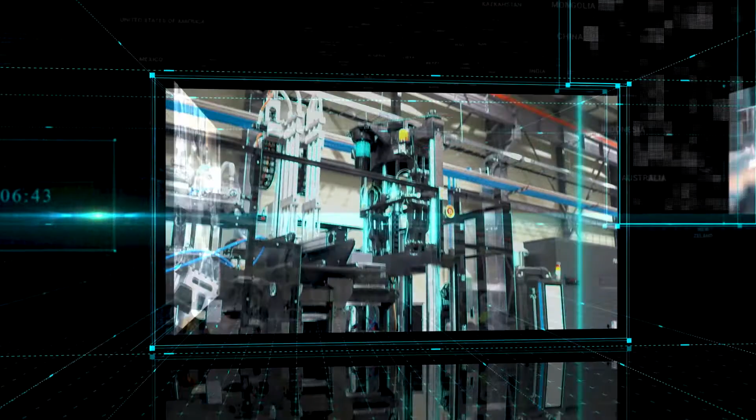While looking at this factory, what are the outstanding leaders? This manufacturing plant consists of numerous production facilities made by different companies. Some of these intertwined machines are automated systems, but some are operated by workers.

A problem may happen when the facility is working. We have to shut down the whole system until the problem is solved, which usually takes lots of time to find the reason for that problem. This is because there is no leader who can consider all the machines together and operate them as a whole.

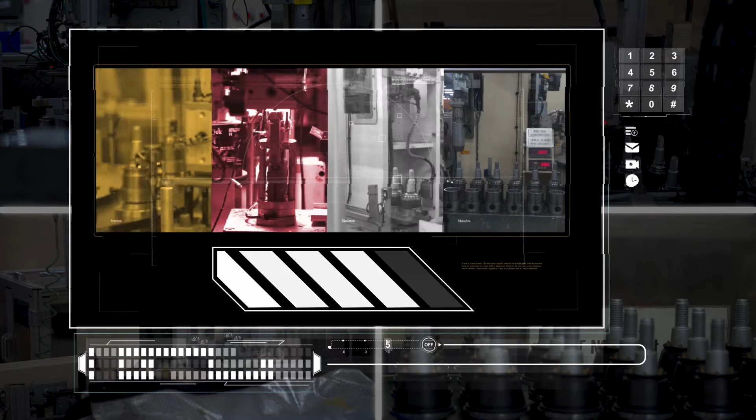Therefore, now we're going to assign a leader who can solve the problem during an emergency. An excellent leader in a manufacturing plant is expected to aggregate data from all the devices and make correct diagnosis accordingly, so as to maximize the productivity of each device. That's the core technology of the manufacturing operation system, as we thought.

What is the AAS-based manufacturing operation system? We can see many applications in real life. You can easily access and utilize various functions through one operation system. The AAS-based manufacturing operation system has the same feature, as it is operated by integrating all the production factors. And we call a factory that incorporates such systems Smart Factory.

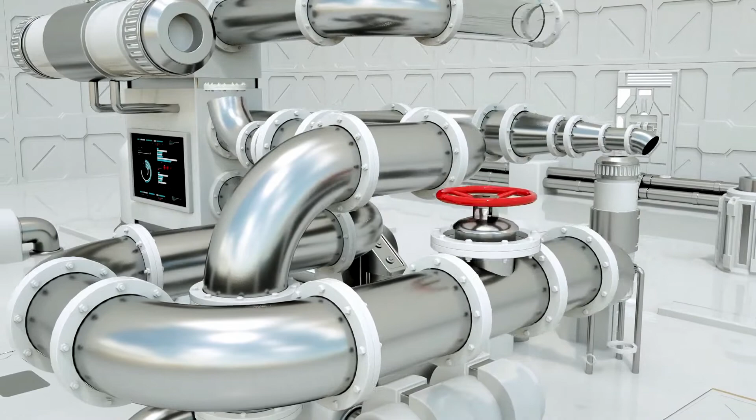Why is AAS-based manufacturing operation system essential in future manufacturing systems? In 2011, Germany proposed Industry 4.0, which provided a new direction for its domestic industry development in line with the Fourth Industrial Revolution. The key vision towards 2030 is to achieve autonomy, interoperability, and sustainability.

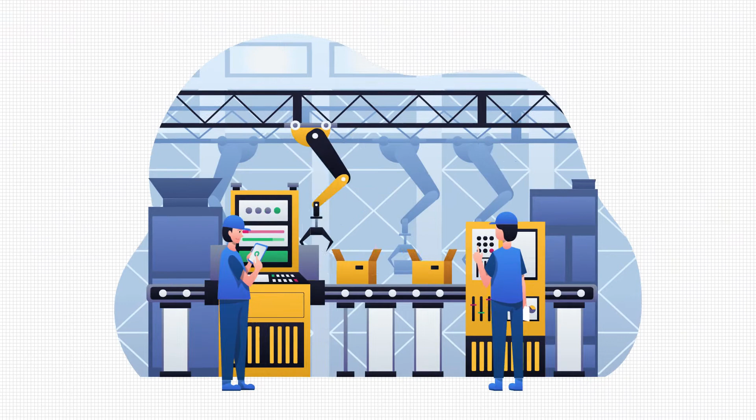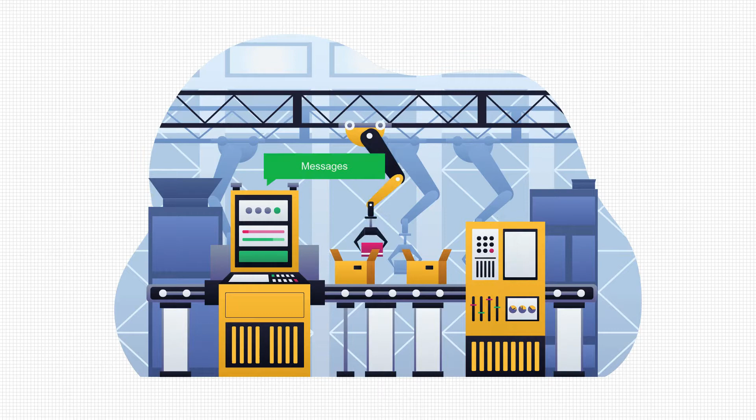Future intelligent manufacturing factories can communicate with each other flexibly, for example, person to person, person to machine, and machine to machine, and it can achieve a sustainable state through process autonomy and mutual compatibility. Through this, many tasks can be performed in a faster and more efficient way than now. The AAS-based manufacturing operation system is essential to enable process autonomy.

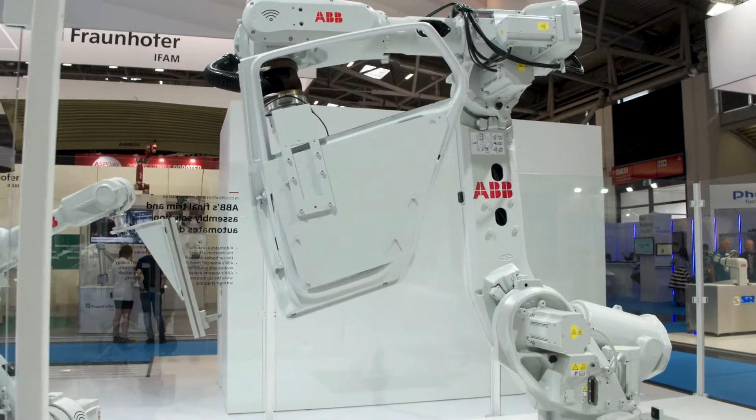In order to make machine and machine autonomously communicate with each other, the first key enabling technology is AAS-based digital twin. AAS-based digital twin technology is a digital representation of objects. Each object is given a digitized name, such as ID.

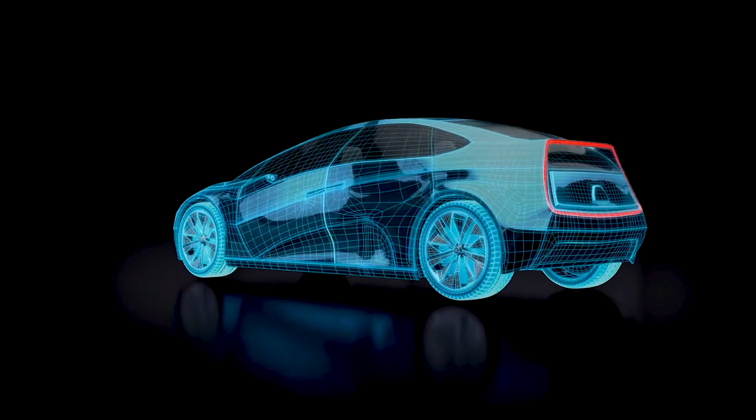There is a cup of coffee. I'll make an AAS-based digital twin for an object of cup containing coffee. For example, the type, color, and size of the cup, the amount and temperature of coffee in the cup, etc. Each of these characteristics is digitized and named individually. Now we can describe all the characteristics of a real cup in the digital world using the AAS-based digital twin we made.

But what if three people, Chosu who lives in Korea, Michael who lives in Germany, and Anna who lives in the United States, make their own AAS-based digital twins for the same object? Three people make AAS-based digital twins for the same object, but they cannot understand and utilize each other because expression ways are different.

Thus, the AAS technology can help freely express and exchange all the characteristics and functions of a same object using a standardized language the machines can understand.

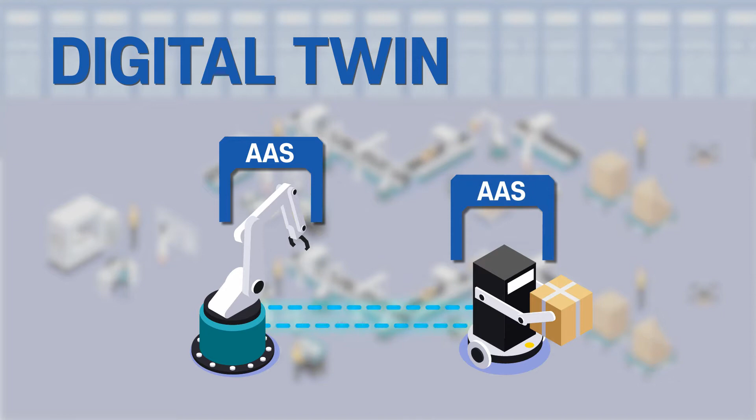Let's enter a real factory. There are many devices connected with each other in this factory. If these devices are represented through AAS-based digital twins, then devices will be able to autonomously communicate with each other and flexibly execute tasks in the digital world, like the communication among humans.

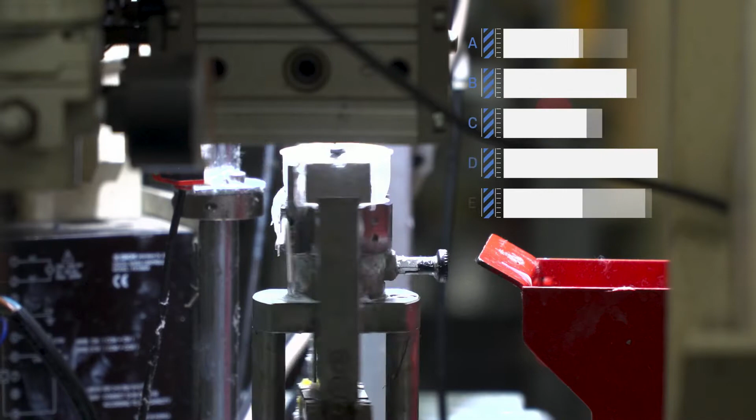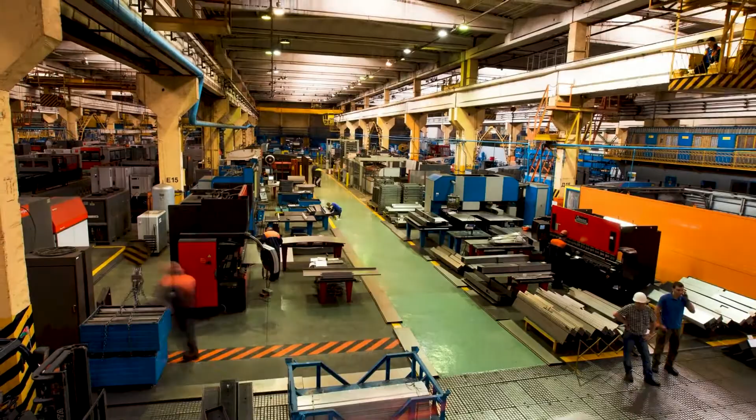In addition, this is not just the communication among devices, but it can also be extended to the communication between factories. Data generated at the manufacturing site use different rules depending on the manufacturer, such that their expression forms are all different. Edge connectivity helps connect various manufacturing sites. It connects different network technologies, converts field data from different systems into structured data as defined by AAS.

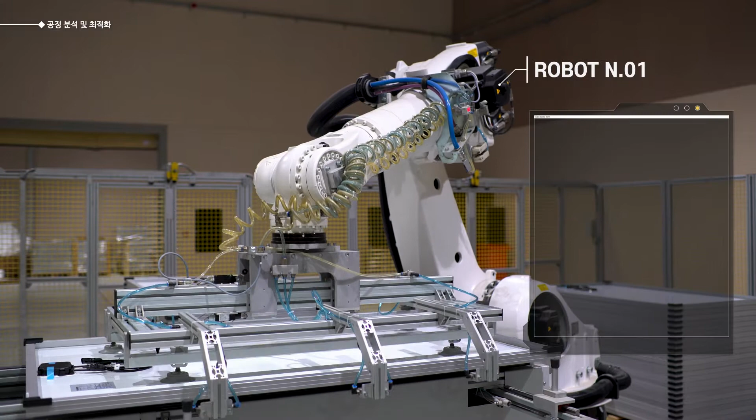AAS-based manufacturing operation system plays an important role in analyzing the production process by collecting data from all the production equipment in real time and assigning meta-information to those collected data. In particular, some data which were collected without a specific purpose can be important from the perspective of other devices. Through this data collection and analysis process, various measures can be proposed to improve productivity and reduce defect rates and costs.

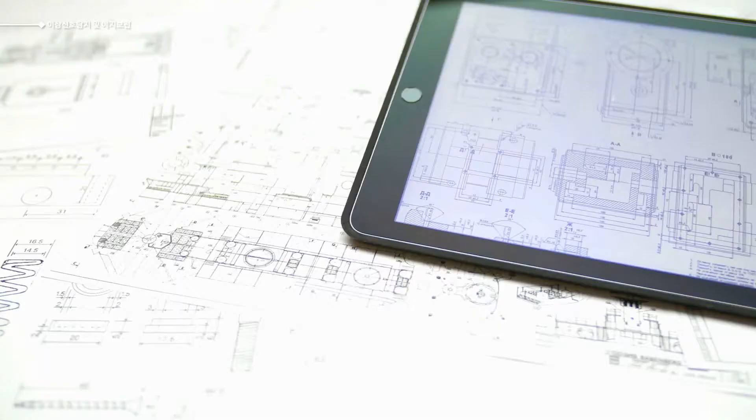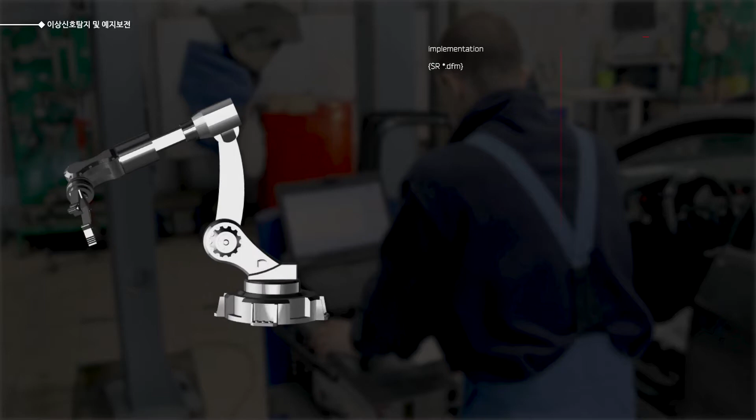A typical application example of AAS-based manufacturing operation system is Abnormal Signal Detection Service. By continuously accumulating the data, we can detect and prevent failures in advance, which are usually hard to predict during the design process. Even if a failure occurs during the operation, the failure reason can be quickly identified based on the device configuration information and operation state information. Finally, the device can be repaired in a fast way.

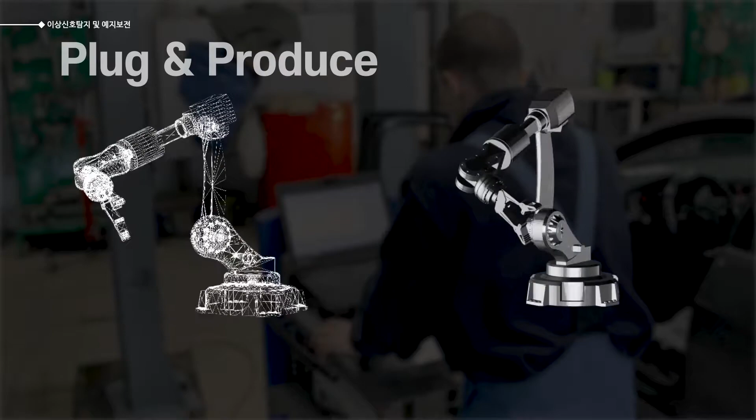If a device needs to be replaced, we can utilize its digital information to quickly find the same model or a replaceable model. In addition, the plug and produce scenario can be used to minimize the setup time when replacing a new device, and can also quickly acquire device information in case of failure, so as to dramatically shorten the production interruption time. In this way, we can prevent failure in advance or respond quickly to the failure once it occurs, which will greatly increase workplace safety and improve productivity.

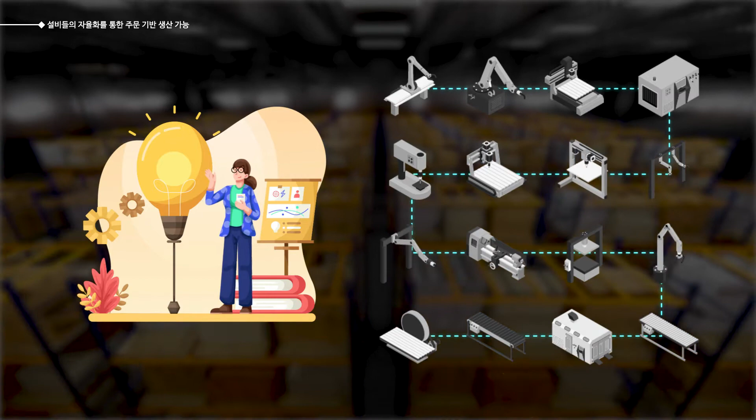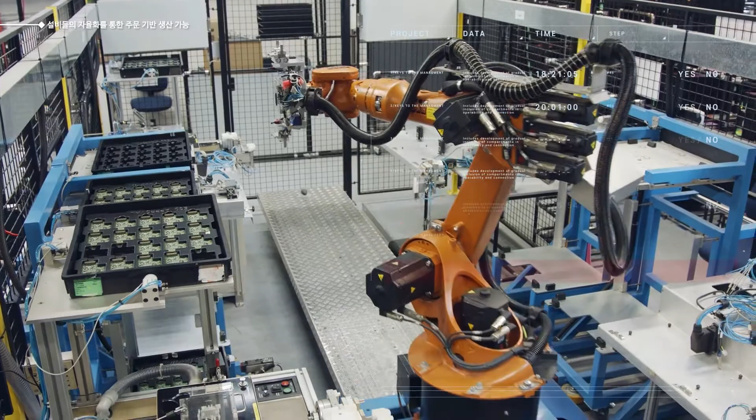When new products need to be manufactured, devices firstly interact with each other to analyze and compare the manufacturing information as well as their own device information. Afterwards, qualified devices are automatically selected and ready to manufacture new products. An optimal production process is automatically proposed. Then the operator will select the most appropriate option, and accordingly the production process will be autonomously adjusted, and finally the production starts.

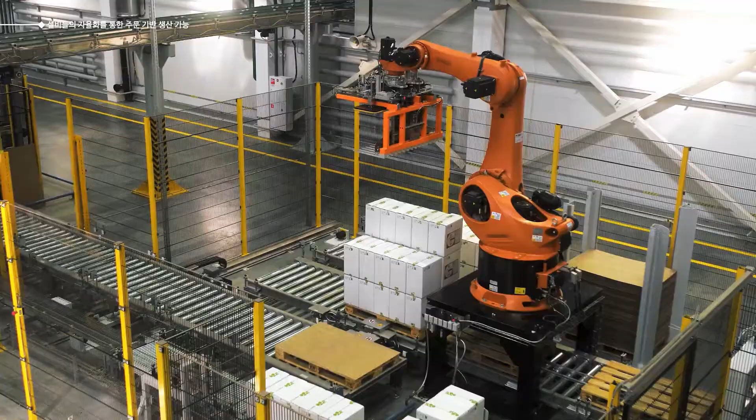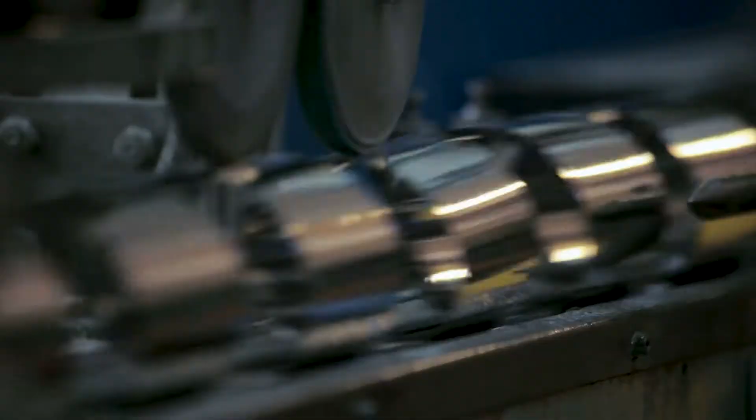The significance of the AAS-based manufacturing operation system is not limited to production and operation. It also plays an important role in reconfiguring new factories or production lines. From the design stage, the most suitable devices are first recommended in the digital world, and then we can do simulation using that digital information before ordering real devices.

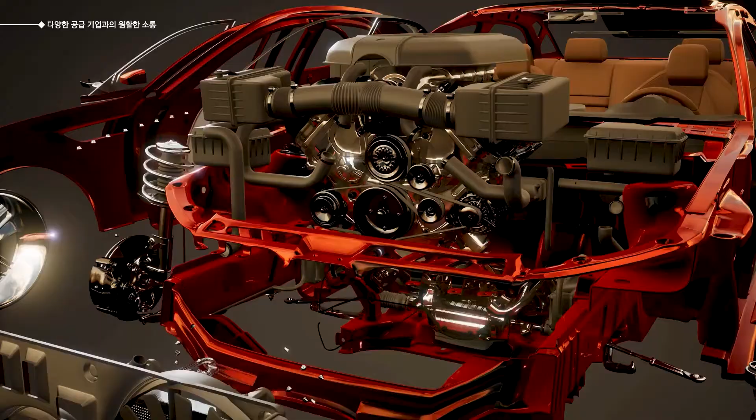One factory is organically related with other factories that supply components and devices to it. Considering this, the role of the AAS-based manufacturing operation system is quite important, and appropriate information and feedback are shared along the entire value chain, beyond one factory itself, and among different businesses. This will help create more effective business relationships.

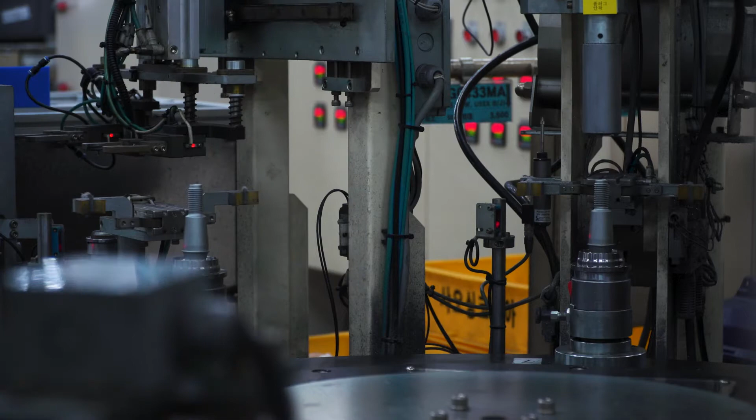We chose a real production line as the demonstration manufacturing line and applied the AAS-based manufacturing operation system. Through the edge connectivity provided by this system, all the data generated from the production process can be collected through the middleware and linked to representative smart factory services, for example, a production management system.

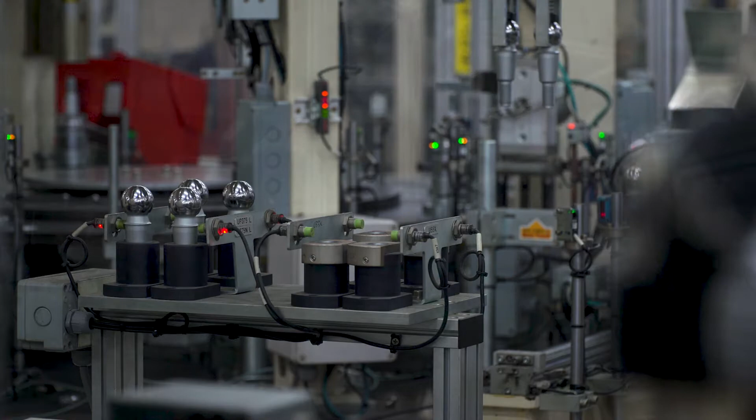The manufacturing process consists of various devices and unit processes, and each process and device is composed of various solutions using independent network technologies.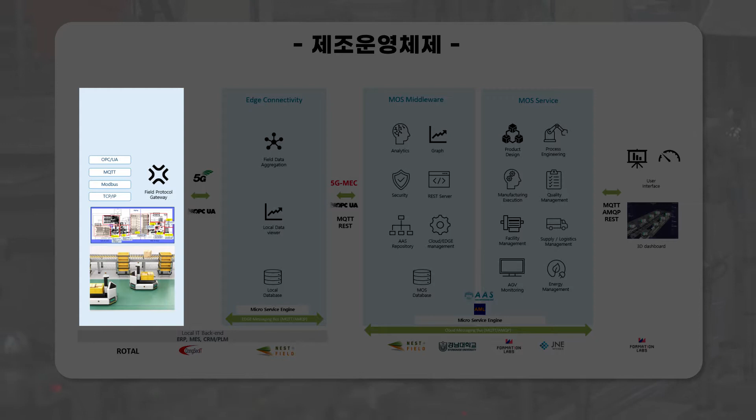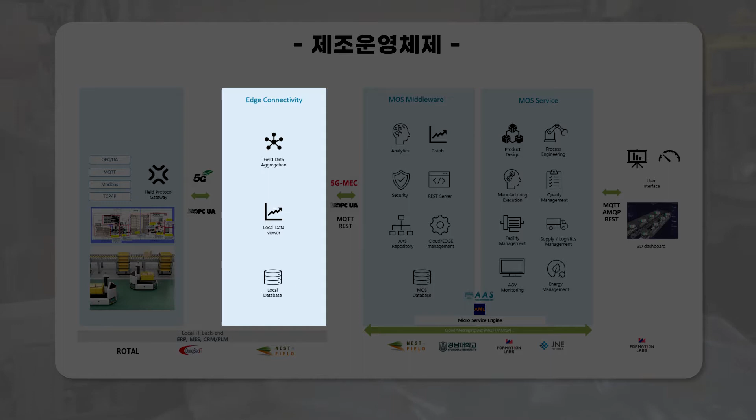The edge connectivity layer of the AAS-based manufacturing operation system utilizes various data conversion solutions to collect data generated from different solutions, and then structures the collected data based on the AAS information model so as to enable consistent data management. The middleware manages the AAS-based manufacturing operation system and provides real-time collected data and historical data to the service module through a uniform interface.

It provides simple dashboard functions for visualizing real-time collected data, historical data, and AAS management functions. In order to realize a more advanced AAS-based manufacturing operating system middleware, we have built an abnormal signal detection artificial intelligence platform to detect abnormal signal patterns from the real-time collected data through machine learning.

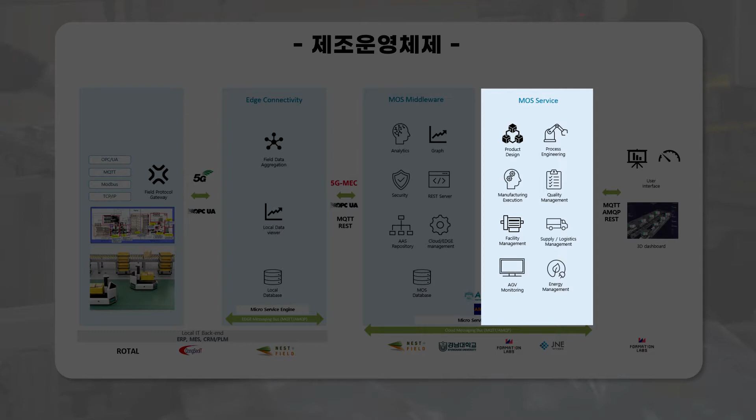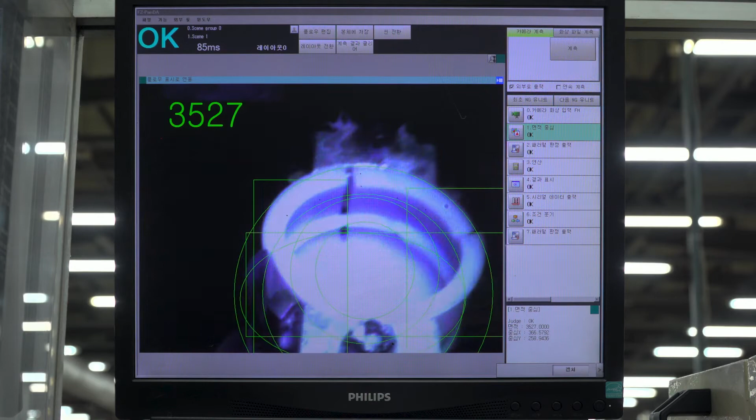The AAS-based manufacturing operation system can provide various smart factory functions by utilizing the data collected from the manufacturing site. In the edge connectivity layer, we additionally provided a protocol conversion device to collect data from PLCs already built on the demonstration manufacturing line, and converted the PLC data using legacy field bus technology into OPC UA data.

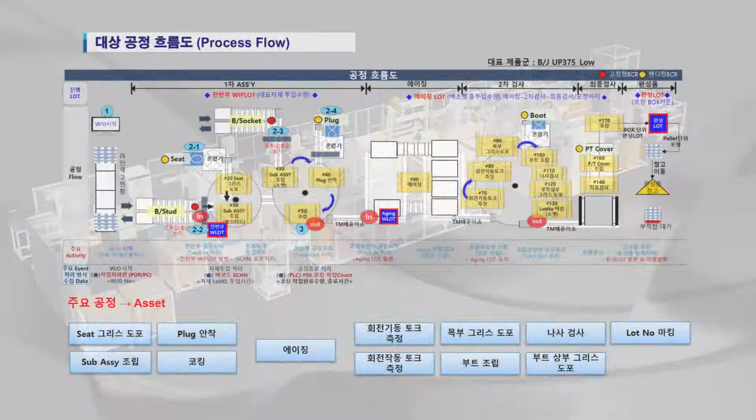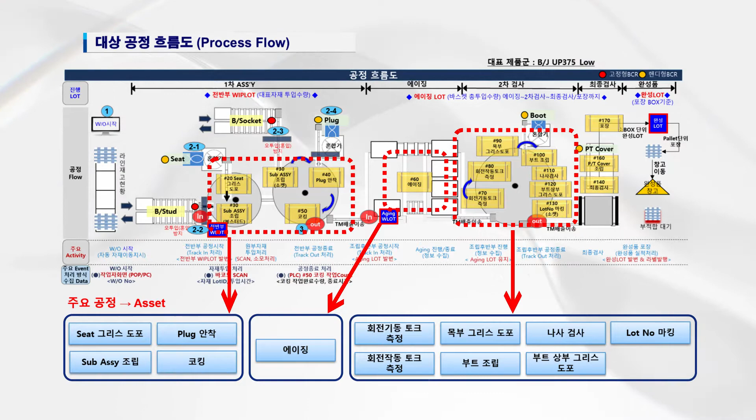We analyzed the demonstration manufacturing process and divided it into several specific processes, analyzed devices and data for each process, and finally modeled the demonstration process into systematical AASs.

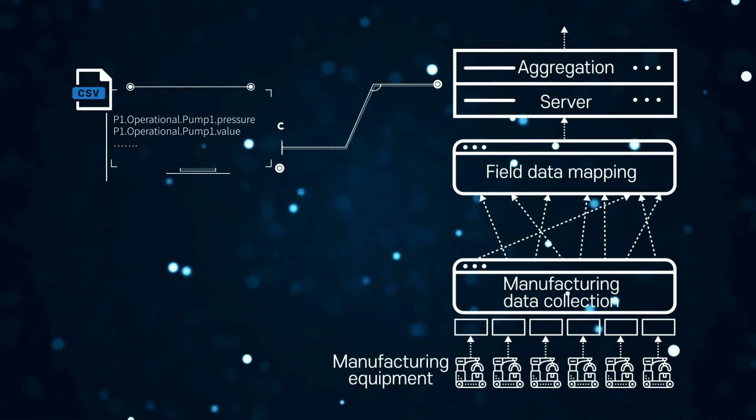The created AAS not only includes real-time operation data for the target process, but also includes device identification data and technical specification data, etc. In addition, metadata with explicit meaning, type, and unit is also modeled into the AAS.

AAS-based data is collected through the edge connectivity of middleware. The middleware is built with a message bus structure so that multiple service modules can quickly share the data collected in real time.

The collected data is shared through the messaging bus, stored and utilized in the time series database module, and then selectively transmitted to the 3D digital twin model to demonstrate the real-time state of the process on the screen.

In the artificial intelligence platform, abnormal patterns are detected in real time based on information learned from the selected data, and the process data can be freely used by upper services such as MES.

The historical data stored in the time series database can be used for artificial intelligence learning, performance analysis, failure response, and strategy optimization in various upper services.

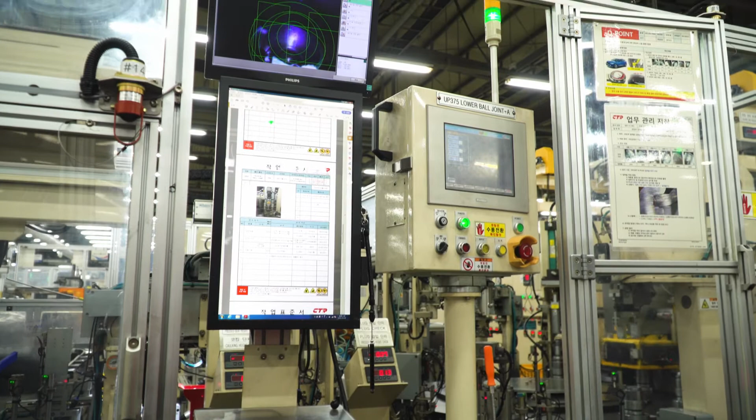The 2D Dashboard is a default package provided by the middleware to visualize the main data among all the collected data that needs constant monitoring. We selected the main information of the demonstration manufacturing line and accordingly designed the image on the screen.

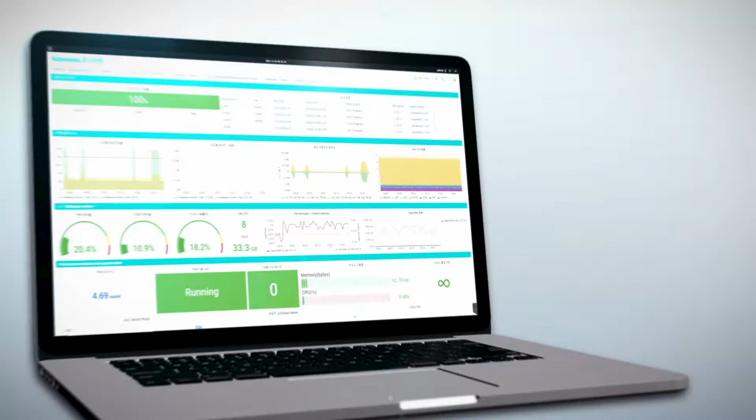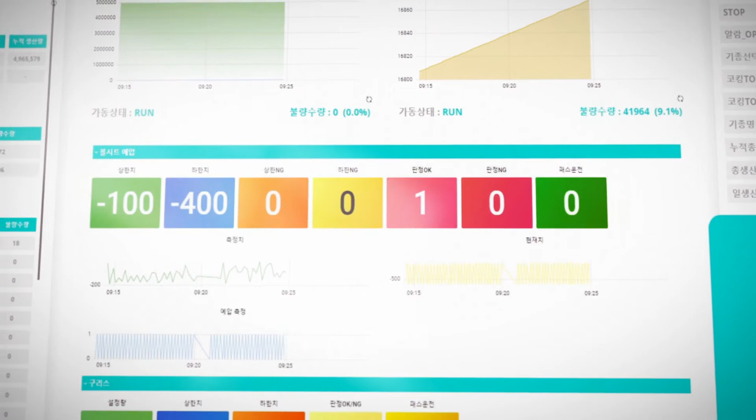The Resource Monitoring Dashboard allows you to monitor the current status of major resources such as computing power, memory, and storage capacity required to operate the AAS-based manufacturing operation system. It is possible to design the most appropriate driving environment for building this system.

Through the package browser, you can manage the AAS model used in the manufacturing operation system, and all the configuration settings for performing data collection can be automatically executed through AAS's internal conversion function.

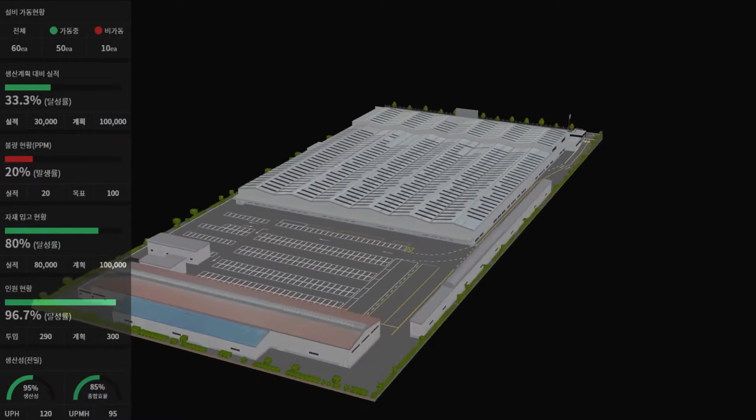We implemented a 3D dashboard service which can show the operation status of the demonstration manufacturing line as a 3D model. The 3D dashboard service shows the appearance of the entire factory and key indicators for various processes inside the factory, and also illustrates the operation status of the demonstration manufacturing line in detail.

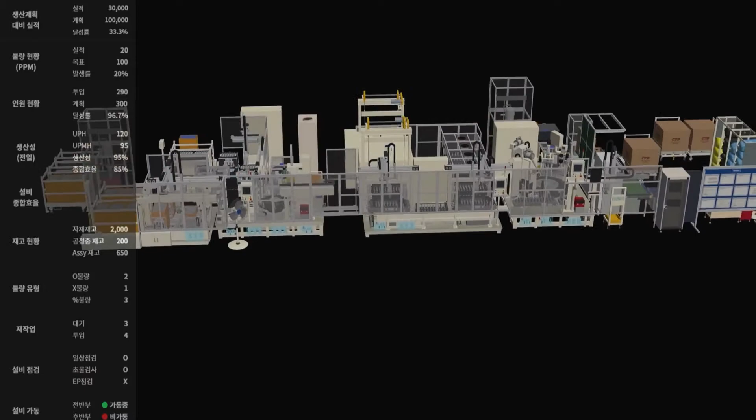Middleware can collect data from actual manufacturing sites within 100 milliseconds on average, and can also deal with more than 3,000 transactions per minute. As such, the 3D digital twin can display the actual factory state in almost real time.

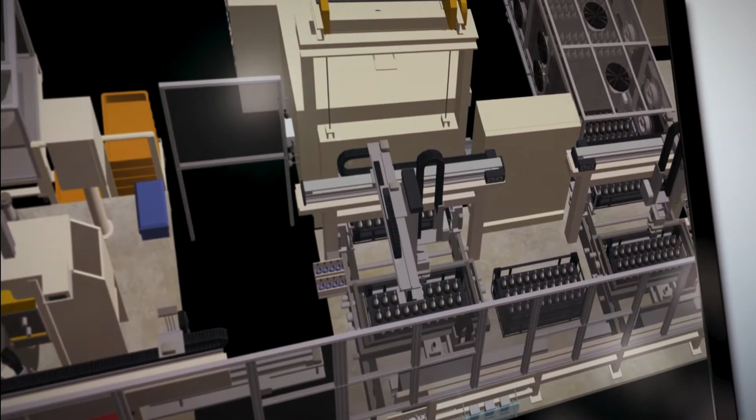The 3D dashboard service receives and then displays major performance indicators from the production management system service. Middleware plays a key role in data exchanges between these services.

Services such as 2D dashboard and 3D visualization are representative real-time data services that can help you intuitively and quickly check the state of the process.

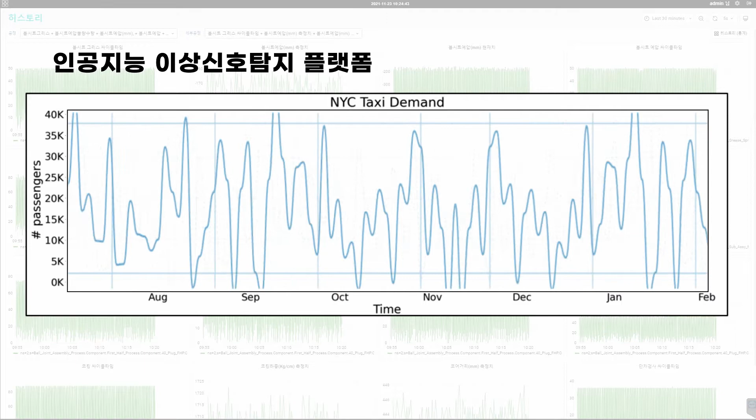Conversely, abnormal signal detection service is a representative service which utilizes historical data that has already been stored. We further generalized the service such that it can be widely used in smart factories as an abnormal signal detection platform, and it is connected to the AAS-based manufacturing operation system.

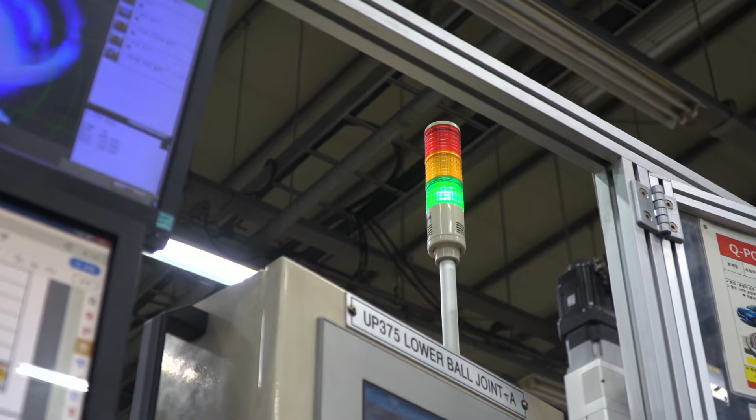Abnormal signal detection platform is an AAS-based service that can learn normal signal patterns through selected datasets and analyze the collected data in real time to detect abnormal situations in advance and make preventive responses.

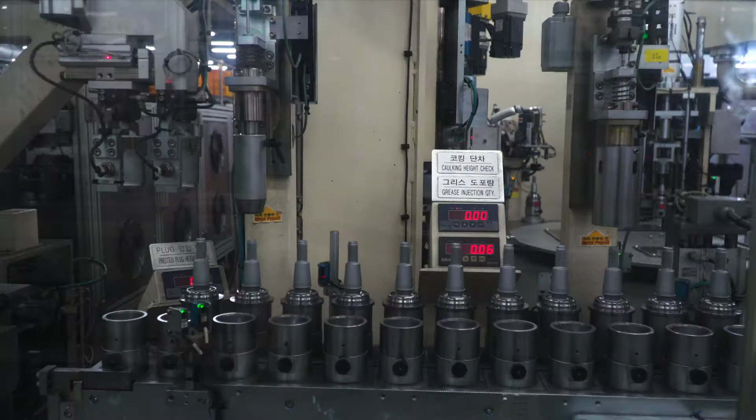Currently, it has been confirmed that abnormal signals can be detected using test datasets, and we are also trying to verify the learning functions using the datasets collected from the real manufacturing process.

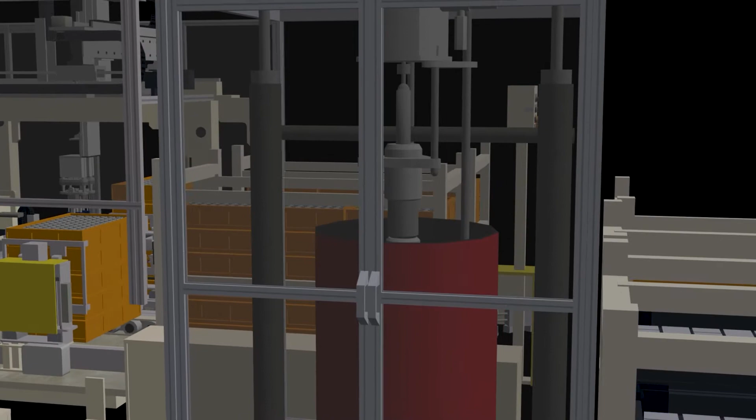So far, all the functions of the manufacturing operation system that we have seen are implemented through a digitalization technology called AAS. Moreover, data collection process is also automated via AAS.

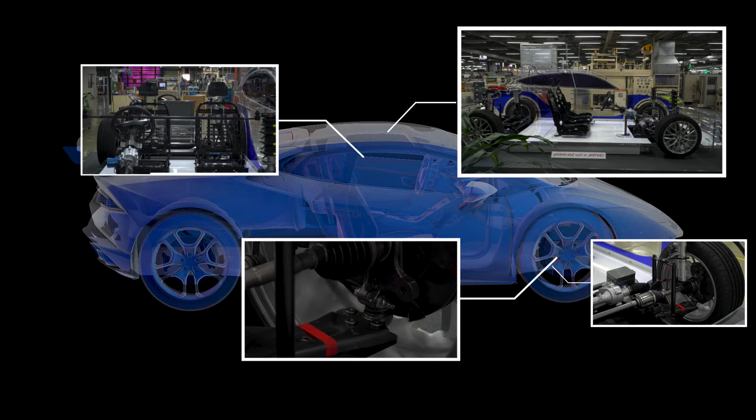In order to automate the data collection process using AAS, a conversion function that can extract AAS information models from various forms is required. An AAS parser is a core function for performing such tasks.

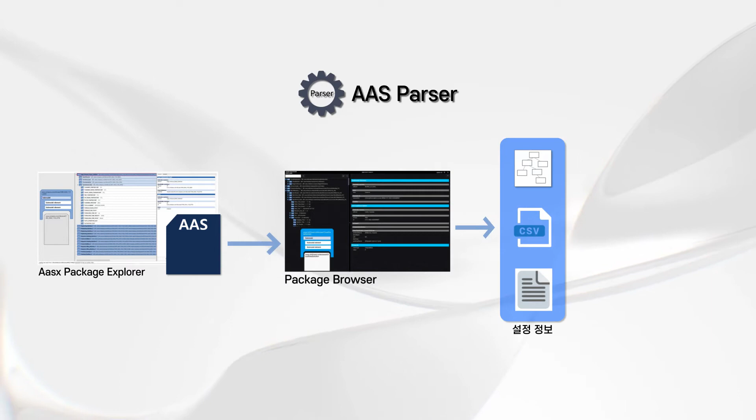The package browser equipped by the middleware provides a conversion function via the AAS parser. Through the conversion function, AAS can be converted into a network configuration file, an information model file, and an engineering file, which will be utilized by middleware and edge connectivity.

In order to apply the AAS format to a system which is incompatible with it, it's necessary to convert the AAS to the format supported by the system.

Therefore, we developed a rule-based automatic switching system that can convert AAS configured with XML schema into JSON, or convert AAS configured with JSON into XML schema. This conversion technology is expandable because AAS-based technology can be applied to various industrial fields in practice.

We have developed a MOM platform oriented for AAS-based manufacturing operation system. Herein, convergence and communication infra layers are operated by MOS that transmits data to microservice architecture-based services through messaging buses.

Such a cloud-based infrastructure guarantees the scalability and stability, and the resources needed for redevelopment can be minimized through applying or reusing microservice architecture-based services.

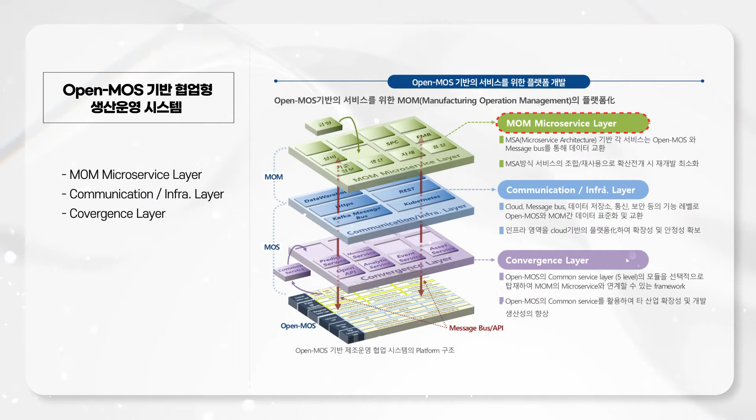In order to efficiently utilize the features of the cloud, we have established a development environment for constructing native cloud architectures.

The systems defined in MESA ISA-95 and Siemens MindSphere type were taken into consideration when constructing specialized service manual for assembling automobile parts.

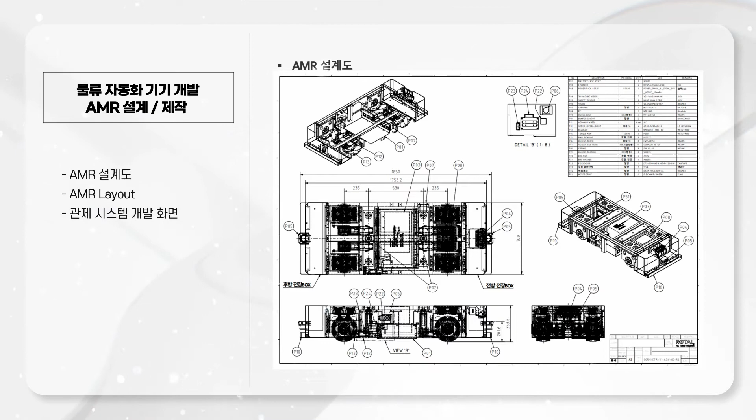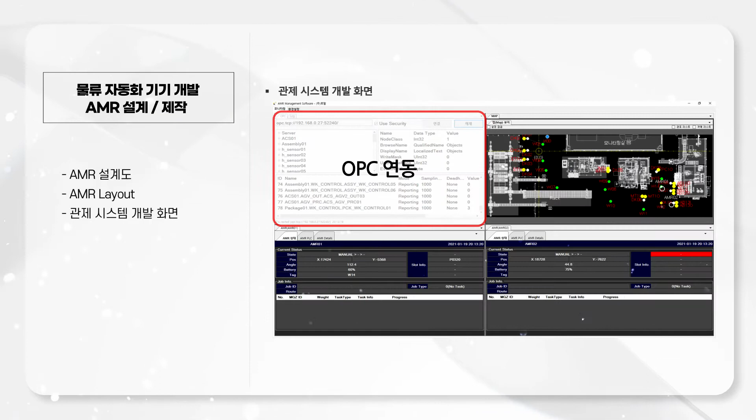To provide logistics automation services in the factory, AMR and AMR control systems were designed and developed. By connecting with the system through 5G wireless technology, AMR has developed a web-based solution that can identify the location of AMR and monitor its status in real time.

Accordingly, existing factory logistics can be flexibly adjusted based on the real-time requirement.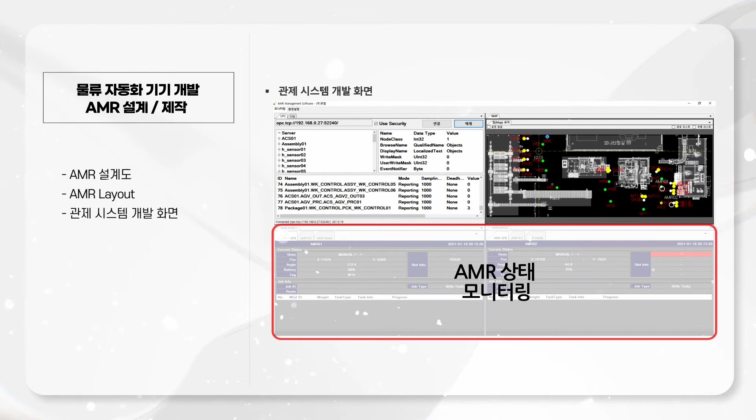Before implementing AMR, we developed a function that can perform pre-verification through simulation, for example, based on Automation ML-enabled digital twin. In accordance, it is possible to detect problems in advance and respond to various potential problems before field application.

In addition, even if there are only 1 or 2 real devices in operation, we can verify the expanded case using simulation when 10 to 20 units are added.

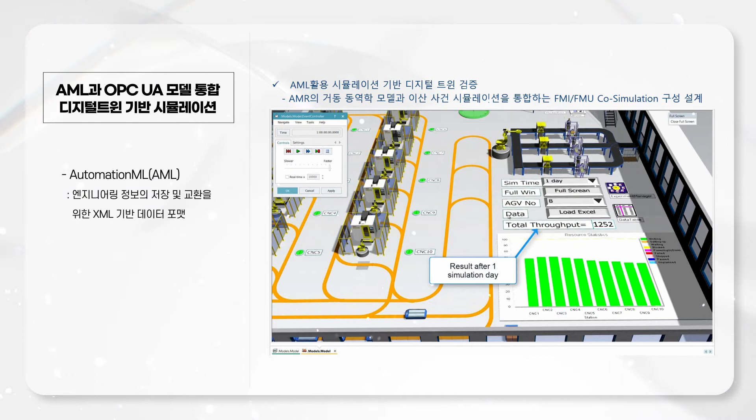We verify the plug-and-produce scenario by applying AAS-based manufacturing operation system, edge connectivity, and middleware solutions to the test bed.

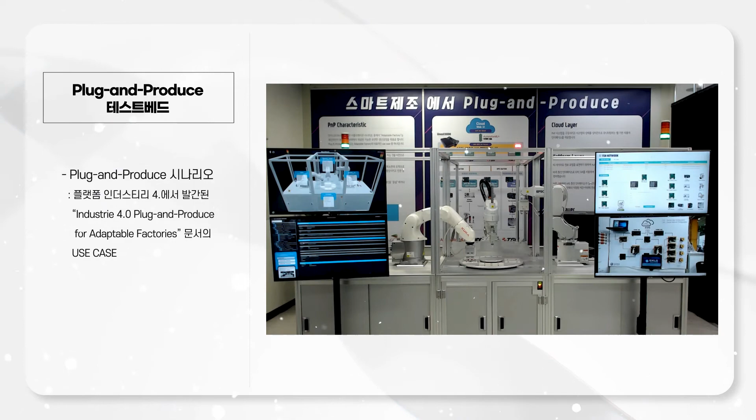In addition, in order to minimize the workload required for AAS development, an AAS reference model for common equipment such as robots, AMR, and CNC was developed and applied to the test bed.

We will build, disclose, and distribute open-source websites for mid-sized and small-sized enterprises to easily access digital twin solutions, which are developed and verified through this project.

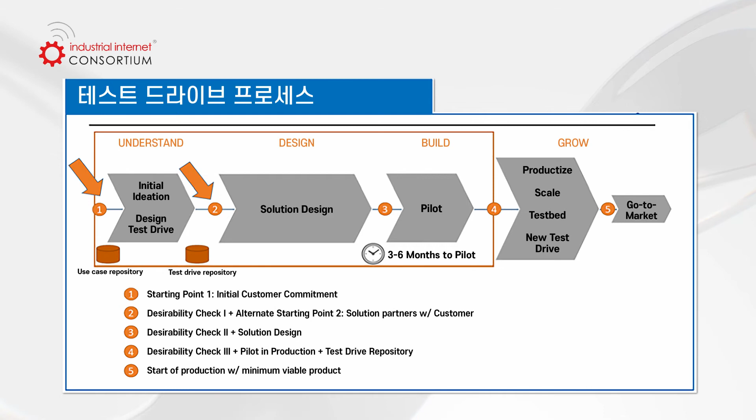Solutions will be verified through ICT Convergence, AAS-based manufacturing operations system development and demonstration projects, and the reliability will also be guaranteed through the Industrial Internet Consortium certification procedures.

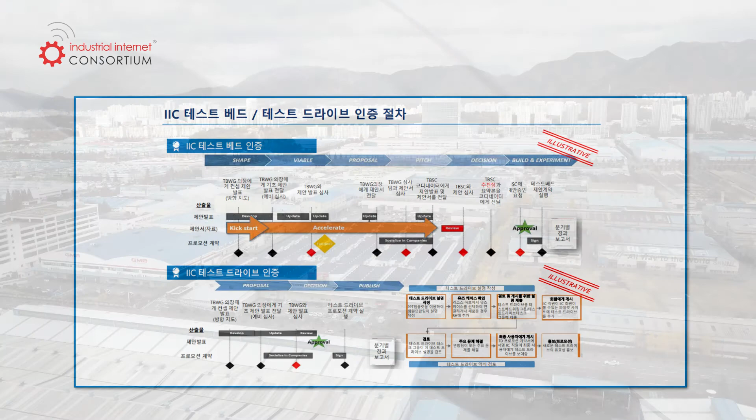In addition, through expanding projects not only for central but also for mid-sized companies, more than 150 practical cases will be created around the Gyeongnam region.

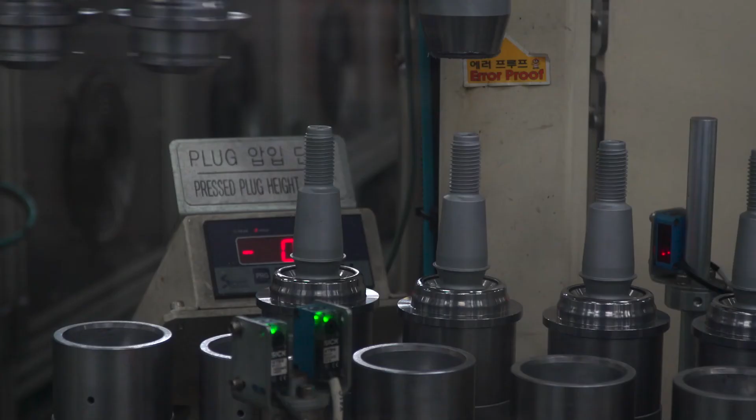AAS-based manufacturing operations system aims to improve the productivity of manufacturing companies by building smart factories with the objectives of acquiring manufacturing data easily and quickly.

In the first stage, we proposed a solution that can systematically collect and utilize field data. Moreover, the feasibility and performance were confirmed by applying the solution to a demonstration manufacturing line.

In particular, we put the focus on the visualization of data collection and verification. In addition, we have established a suite of strategies to quickly disseminate and deploy these related technologies in small and medium-sized manufacturing companies in Korea.

Based on these achievements, in the second stage, we will develop technologies with the goal of establishing edge connectivity that can be applicable to various manufacturing environments, developing middleware that can provide more systematic data interfaces, various data services oriented for use case testing.

In face of the fourth industrial revolution, we are heading for a greater future. This is because there is an advanced manufacturing operation system made through the efforts of representative cutting-edge companies.

In the future, the established manufacturing operations system is expected to help Korea grow into a global leader in the era of Industry 4.0.